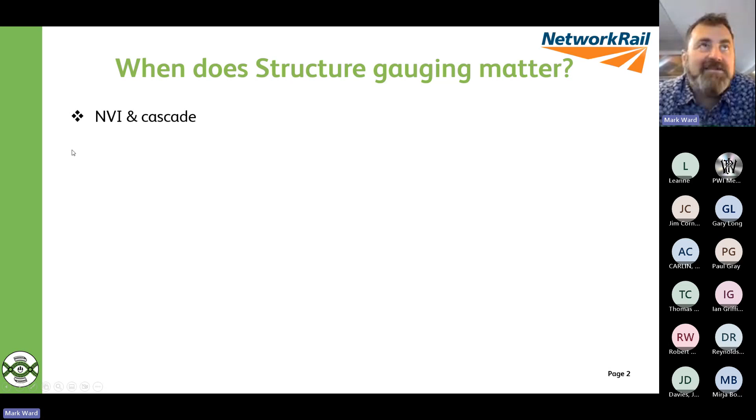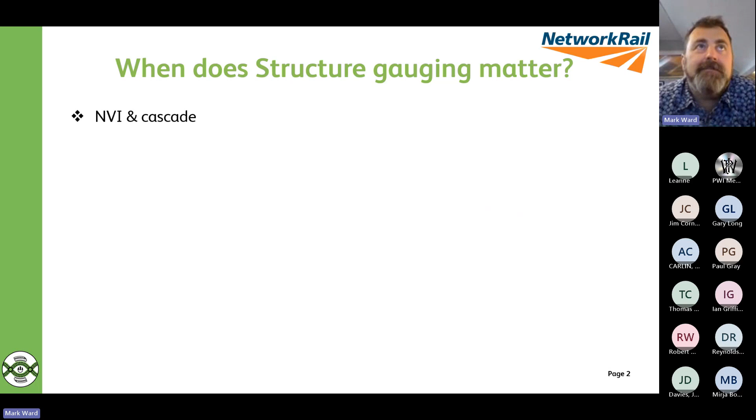First thing is, usually when I'm doing this in a room, I ask what people think - when does structure gauging matter? So I'll run through the list. When we're doing new vehicle introductions and cascades, we need to know if the vehicle is going to be compatible with the infrastructure and vice versa. It's important that we have a gauging analysis at that point.

When we're doing new infrastructure design and build, we need to make sure our new infrastructure isn't going to clash with the first train that goes through. We need to make sure the six foot is wide enough to enable good passing clearances. So it's important then. Freight enhancements as well.

We seem to be getting ever bigger boxes coming in on these big ships - nice big square boxes which don't really work very well with our arched overbridges. So when we're doing freight enhancements, we need to know how much room we've got to safely run freight around.

Infrastructure renewals - if we're doing a track renewal, for example, we need to make sure that when we put the track back in, we're getting sufficient clearances to existing structures. Likewise, if we're rebuilding an overbridge, we need to make sure that overbridge gives us clearance to all the vehicles currently operating, and maybe operating in the future if we've got that level of visibility.

It's also like allowances for electrification. Infrastructure maintenance - we need to know if we're tamping the track and moving that around, we need to make sure we're not affecting clearances in a negative way.

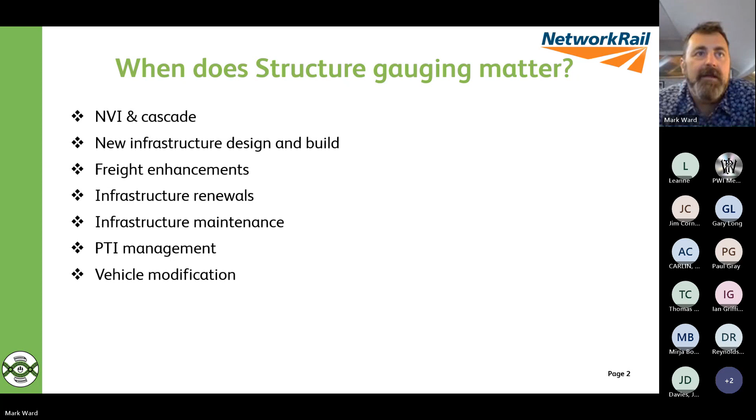Platform train interface management - platforms are a bit special. We need them to be close enough so people can get safely onto trains, but not so close that we hit them. So we need to know where we are in terms of gauging and stepping distances at that point. Vehicle modifications - if we're doing any additional bits of modification to a vehicle...

The example I always use is we've been through quite a few fleet enhancements recently, putting Wi-Fi on. Those have all got antennas which sit on the roof of the vehicles. We need to make sure we're not going to knock those off on the first overbridge we come to, and that it's still safe to operate.

Freight and passenger diversions - if something's gone wrong on the main line, can we still get that freight from A to B? What do we do with all the passenger vehicles sat there on the line waiting to move? Can we send them via alternative routes?

Steam locomotive movements - we've got a big focus on getting passengers back onto the railway. Leisure travel seems to be the bit that's really being focused on. Part of that is running steam locomotives and other charter vehicles around. They're not fully permanently cleared in the sectional appendix to operate, so we need to know that we can safely gauge them and they'll fit the infrastructure.

Out of gauge loads - things like big military movements of equipment that sometimes come outside of the existing vehicle gauge. Are we safe to move those? Things like wind turbines and pipes for the oil and gas industry, we also move them around quite a bit, so we need to assess that we are safe to move them.

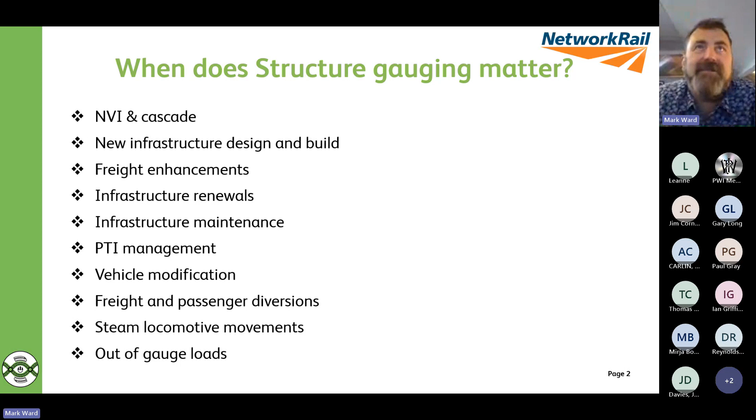A couple of examples here. Stepping distance, obviously that's a nice big wide gap there, which is quite dangerous for our customers.

High output track renewals - are we safe to run adjacent line open in those cases? New infrastructure, that's a Warrior armored personnel carrier. You can see there that's got an offset on the turret, and what we have to do when we're moving those around the country is make sure that offset turret sits in the six foot away from any arched over bridges.

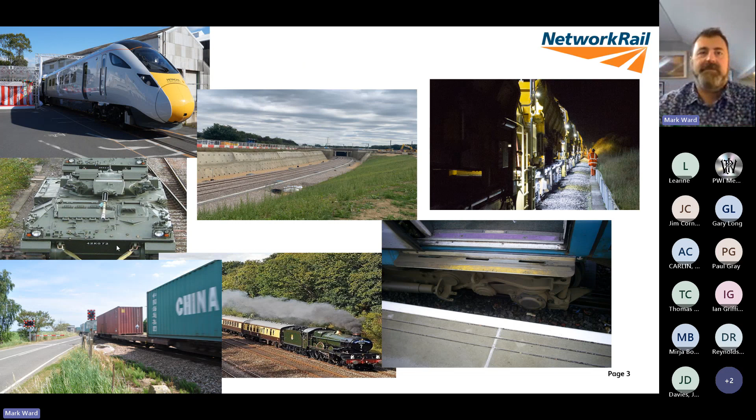So, talk about data requirements. We need a good infrastructure model to assess how big the infrastructure is, where the rails are relative to the arched over bridges or tunnels and any other structures.

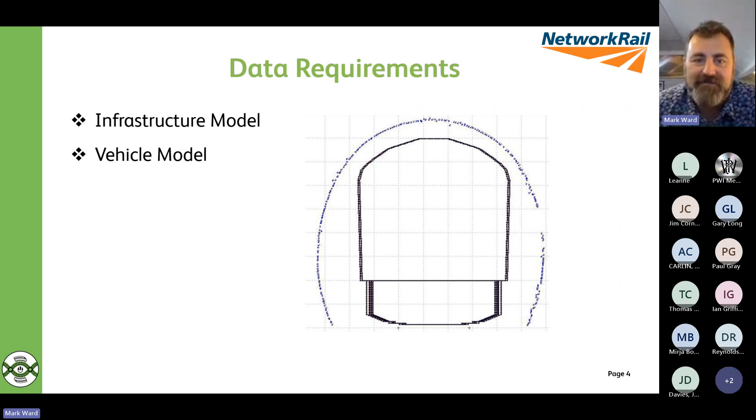We need a vehicle model - how big is the vehicle going to be? Each train is fairly unique now in terms of the passenger vehicles. They all have got the footsteps in similar but different positions. We have long trains, so 20-meter vehicles, 23-meter vehicles, 26-meter vehicles. They all have different throws when you get to curvature, so we need to understand what that's doing.

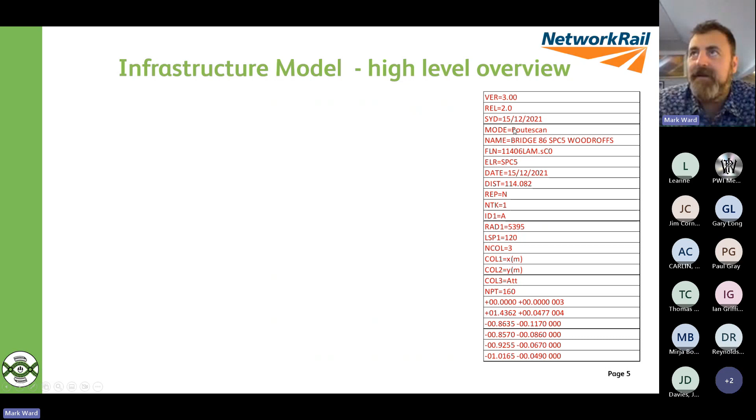High level overview of the infrastructure model. This is what we call a format for an SC0 file. That is formatted from RIS 7773, which is the specification for it. Within that, we need to know what the survey method is.

The different survey methods have different tolerances.

Bear with me one minute, apologies for this. No issues.

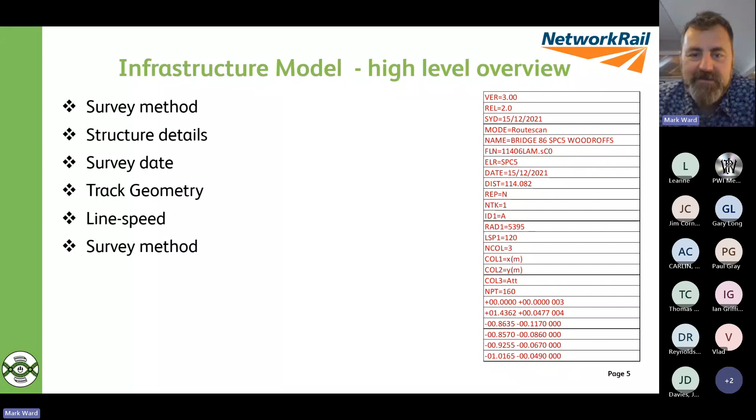The presentation's gone as well, mate. Sorry, hang on, here we go. No. Yep, that's it, perfect. Been one of those weeks. Right, so...

Line speed will affect how much the dynamic input is in the train. Survey method affects the tolerances. The rail coordinates - so we have 0,0,0,0,0. Attribute 3, that is the left-hand rail. So gauging is all relative to a point in space, which is the left-hand rail as the datum point. You'll see that the right-hand rail has got about 14, 36, 2, and then a value. So that effectively is your track gauge plus your cant and the datum.

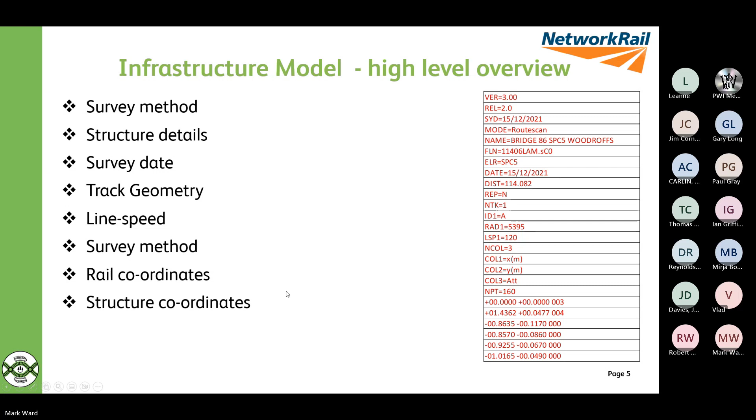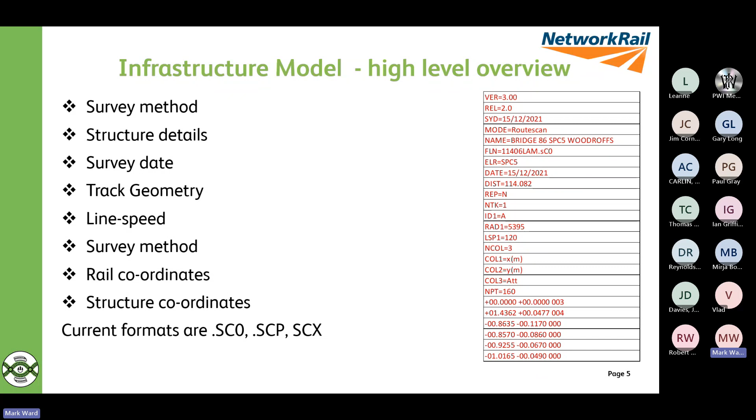Then you have the structure coordinates. All of these coordinates relate to a point in space relative to 0,0. It just helps build up that picture. The current formats are SC0, which are the structure profiles, SCP, which are the platform profiles, and SCX, which are the 6-foot profiles. If you want more information about what it is and how it's built up, it's RIS 7773 INS.

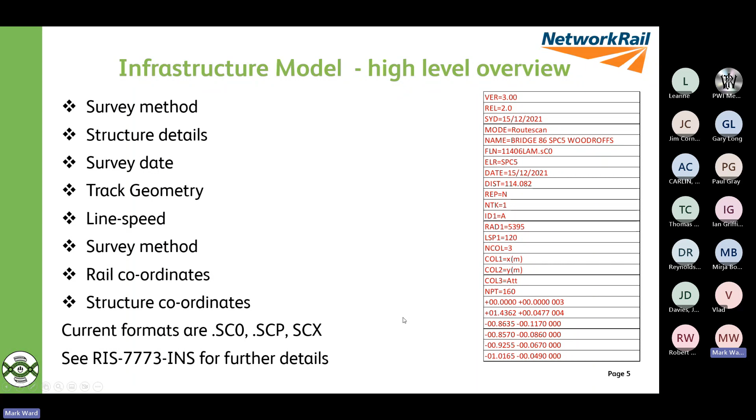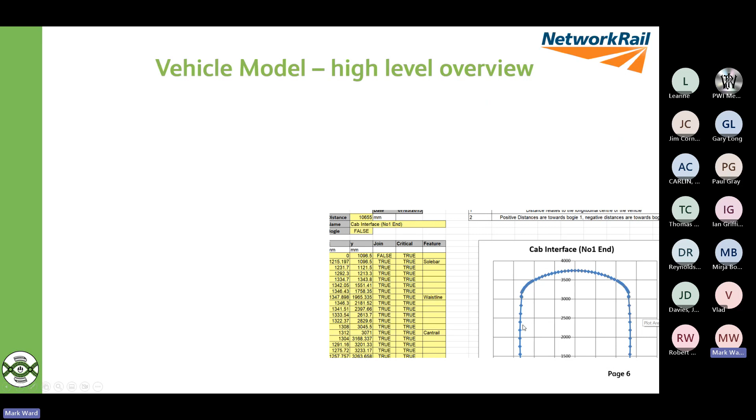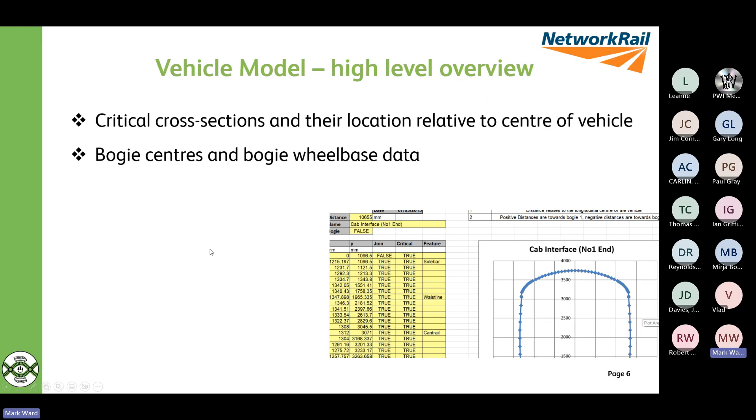Okay, very high level of the vehicle models. Again, it's a set of coordinates, and what you need to know is the critical cross sections - what's the extremity of the vehicle, and where they are relative to the center line of the vehicle. So when it comes to a corner or curvature on the track, we need to know how much those will offset by in terms of their end throw and center throw. The bogie centers and the bogie wheelbase data, that's all in the data in the vehicle model. So the bogie centers again can affect how your throws operate on the train.

Vehicle dynamic data - how much does the train sway around and roll for cant deficiencies? How much does speed increases and decreases affect that? What are the suspension characteristics, so a full train will potentially sit lower than an empty train. It's all of those sort of things that you need to model. What the maximum vehicle speed is - there's no point assessing a vehicle at 125 mile an hour because that's your line speed, if the vehicle itself can only do 70.

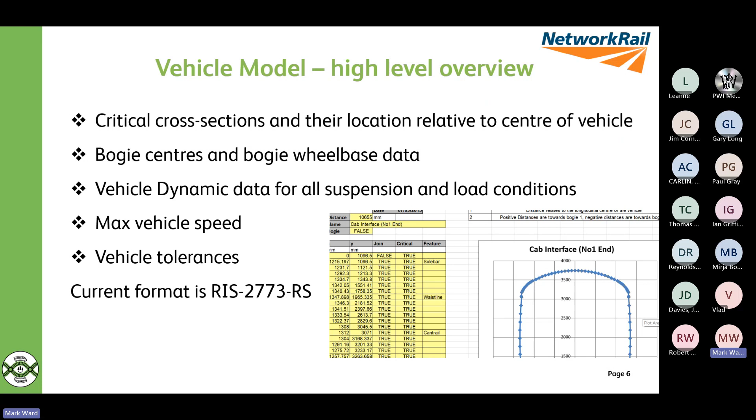What the vehicle tolerances are, so how well it was built. We're getting quite good nowadays at building fairly consistent rolling stock. In the old days, some of the Mark 1s and 2s, there was quite a big tolerance on each different body shell - you measured two at the end of a production line, no two would be alike. So, what the vehicle tolerances are. Again, there is a RIS for this - the RIS 2773 gives you the current format. It's a fairly well understood vehicle model format. It includes all of the above, and it's worth reading because it's quite an interesting read - you go, that's what's included. It helps you understand what builds up these vehicle models.

Gauging group standards and RISs. So the first one is 7073. That effectively is how we categorize and manage clearances.

RIS 7773 is the infrastructure model data. We've got 2173, which gives you some vehicle requirements - how you describe the vehicle, where you would put the footsteps when you're building a new vehicle, what compliance looks like for stepping distances, and RIS 2773 for the model itself. Then we have RIS 8273, which says when you're introducing new rolling stock or new infrastructure, you need to do a gauging compatibility assessment to make sure the two play nicely together.

So a big chunk of the work that I do is working with RSSB around current standards, future standards, and research.

Currently there's quite a bit of work going on around 7073. One of the big issues for us as an industry is the requirement for an allowance for window box - where we have the older rolling stock with drop light windows where you have to pull the window down to open it from the outside, you had to have an allowance for that, which was 450 millimeters between the infrastructure and the vehicle.

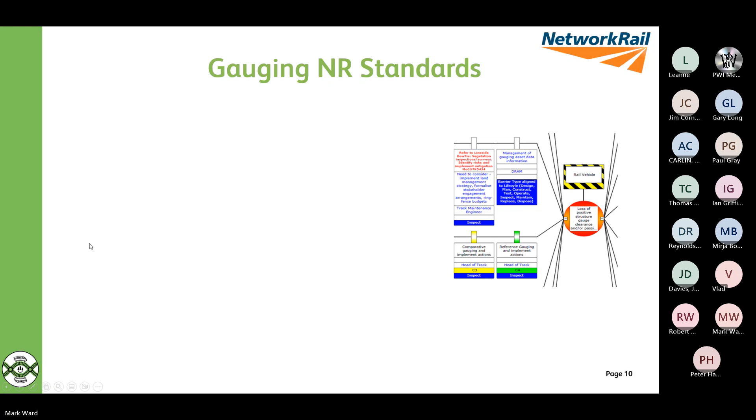Okay, network rail standards then, we are changing them. So we have a new standard coming in called 3204, which replaces 3201 and 3203. Current standard 3201 is effectively what the TME needs to do to manage clearances. 3203 is what we need to do to collect the data, process the data, make it available to our stakeholders.

So we've had a review of the existing standards. They were written in 2011, so they're long overdue for renewal. All based around what we call our bow tie risk management process for gauging. So we have a high level event, which is the loss of positive structure gauge clearance and/or passing clearances. We had a moving rail vehicle into the mix, then you have an issue if you've got to that point.

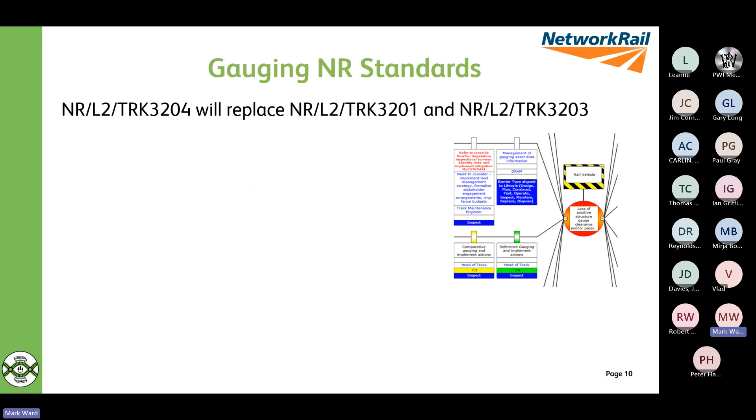So what are we trying to do? We're trying to improve data collection, making it easier for new surveying methods to come in. There's a big push at the moment on point cloud, trying to get those into use. So measure the infrastructure once, use it for many different purposes - getting your OLE, getting your gauging data, getting your digital twin, doing it all from point cloud.

Data currency, so making sure that our data is up to date effectively. There's a bit of a push on that - more of a risk-assessed approach to gauging management.

So at the moment, we treat all foul locations as the same level of risk, whereas that's probably not correct. Some fouls are worse than others. So if you've got a straight track, for example, the track is less likely to move than where you've got high curvature. So the risk would be higher than with the straight track.

So we're looking at wide and low platforms from PTI. Effectively, a high platform or a tight platform is actually quite good for a passenger because it's narrowing that step between the railway footstep and the platform edge. So we're looking at only the wide and low platforms in terms of understanding where we've got those and what it looks like.

Okay, the publication date is December 23, which may or may not slip by a month. I've had a very long conversation today with a couple of stakeholders. Compliance date would be June 24. So we've got basically 6 months from publication to compliance of the standard and get a plan in place to enable compliance. So as part of the risk assessment, doing quite a bit of work.

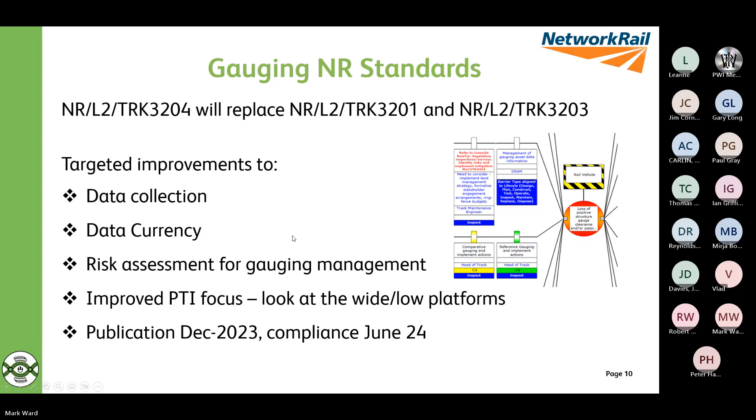So that's the main driving the standard change. Okay, a bit about the network rail systems we use for gauging. So National Gauging Database, we moved to Railway Gauging Data System in August this year. So it's gone live last month, fairly stress-free. There's a couple of glitches along the way.

We're working pretty hard to overcome them. But effectively, as an end user, if you're currently using ClearRoute, you will still be downloading your data from Balfours to use within ClearRoute.

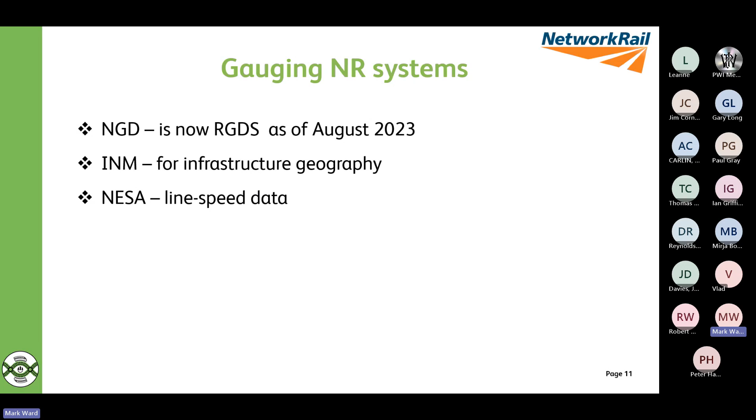INM, so our infrastructure geography, where we are with it, where it sits, that is where we hold that - so that's our vehicle, our infrastructure model, what tracks go where. NESA, where we get our master for our line speed data from. We are not very good at aligning infrastructure engineering data with operational data, so there's a bit of a mismatch between those two, which we're trying to work and get around.

Vehicle matrix - so being able to work out the clearances for any given track, we need to understand which vehicles and gauges are cleared where. When that comes into it is when we work out what our network clearances are. So we know for any given structure on the network what the clearances are to that structure. We know that because we know what the vehicle matrix is - which vehicles are going to go past there, which freight gauges are cleared past there. So that all gets calculated up into RIFT.

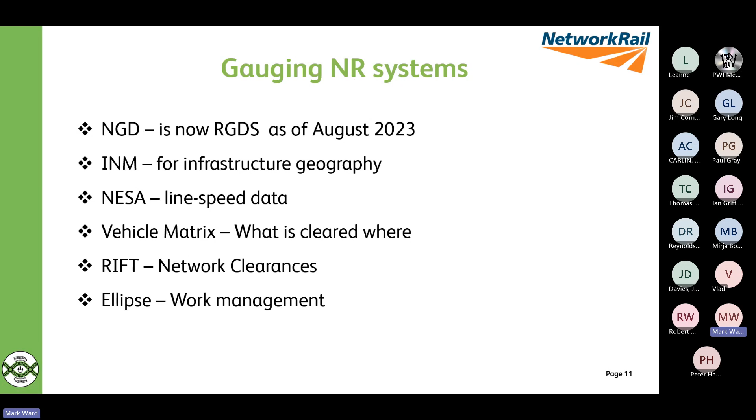Ellipse is where we manage our work. So anything that says you will go and do a manual check at this location gets put into Ellipse. So they're the systems that we use to manage gauging.

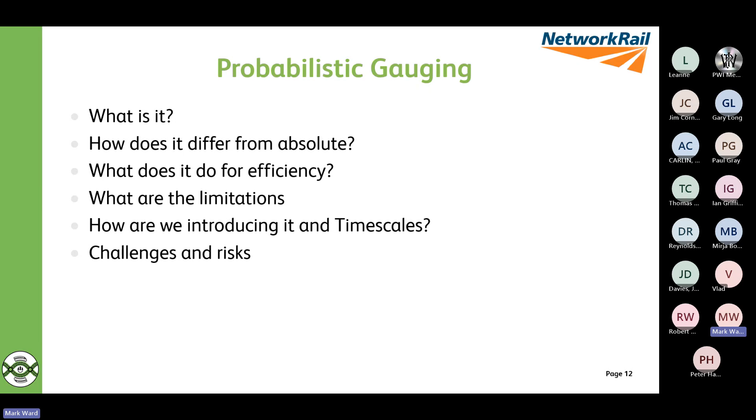Moving on to probabilistic gauging, which some of you may have heard of. I'll cover what it is, how it differs from absolute gauging methodology which is the current one we use, what it does for our efficiencies, and what the limitations are. It works, but it doesn't work everywhere. I'll also cover how we're introducing it and the challenges and risks around it.

First, our current process, which I've talked about a little bit already. We've got an infrastructure data model, a vehicle model, and the standard requirements that tell you how to calculate it. That all goes into gauging analysis software.

Currently there are two flavors of that software. There's ClearRoute, which is Omnicom Balfour Beatty, which probably most of you will be familiar with. There's also a company called DGauge who have Rift. You put the models through all of this with the standard requirements that say these are the allowances you need to operate and include in your analysis. Out of that, you get the absolute gauging output - the clearances as per all the standard requirements against the vehicle and the infrastructure.

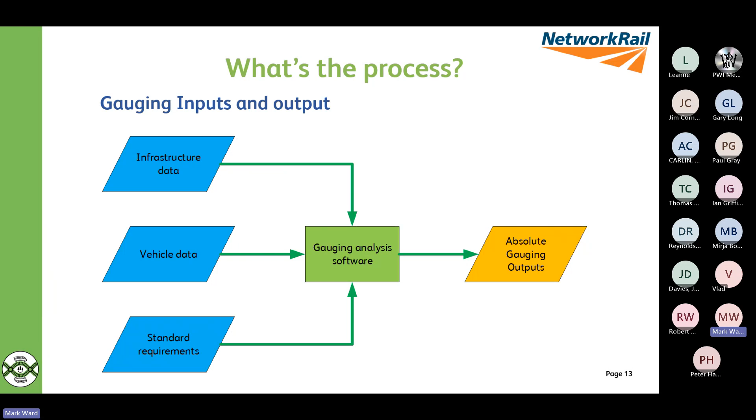So that doesn't change. The existing absolute gauging methodology - we do the calculation, we get the outputs. It will say bridge 10, you've got 50 millimeters, platform 2, you've got 2 millimeters, etc. So it gives you all the clearances.

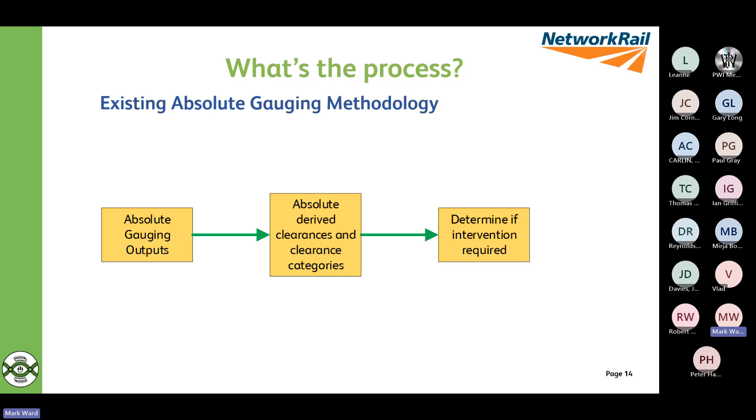We take that and we allocate clearance categories to them as per 7073. That ranges from normal, reduced, special, reduced. At that point, when we have all of that, we then determine if intervention is required. So if we're introducing a new vehicle, for example, we'd take the existing infrastructure model and the vehicle model, calculate the clearances, work out if anywhere has fouls or clearances we're concerned about, and whether we need to do anything about it. That could be tamping the track, altering the position of platform copers, or any range of things. That's what we do currently.

Probabilistic gauging methodology is slightly different. We take the absolute gauging outputs, and the first question we ask is, have we got normal clearances? If yes, effectively we're not interested in that, we just go down that route. If the answer is no, we've got something tighter than that, then we move up to assessing it with the probabilistic methodology. I'll talk about it in more detail in a bit, but this gives you the overall process for now.

So we do probabilistic gauging methodology on the places where we don't have normal clearances, and we get probabilistic derived clearances and clearance categories. We combine the two. So it might be bridge 10 - we use the probabilistic methodology to assess that one because it's less than normal. Bridge 11 might be normal clearances, so we'd use the absolute gauging output straight away without doing anything further. Then we work out if we need to do any intervention. That's the overall process at a very high level.

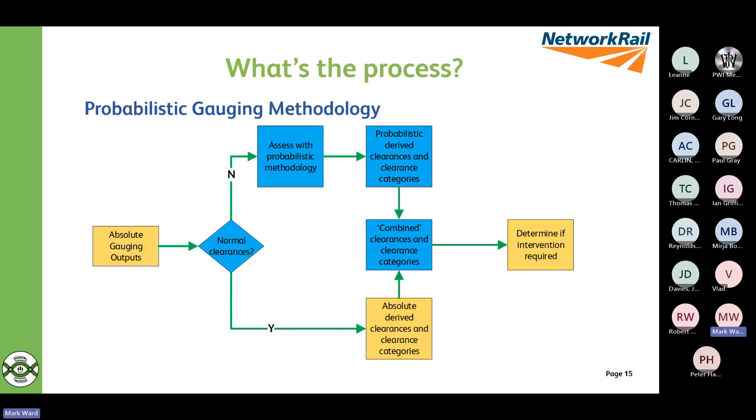For incremental loading, for example - the dynamic movements that get put into it - currently we have to assess tare and crush, and we consider it as a one-off calculation. We'll say this is the maximum envelope the vehicle can take up, both in height and drop. In probabilistic, we'll do the calculation multiple times with various different conditions.

For loading, we apply a 10% incremental between tare and crush. So we'll assess 10%, 20%, 30%, 40%, etc., all the way up to 100% loaded. For vehicle condition, we have a deflated and inflated suspension considered equally.

For an absolute gauging analysis run, you assume that at some point the train is going to be deflated, so you allow for that in the calculation. Part of this is as high as it can be, this is as low as it can be - it generally affects the height, so it'll be sat low in its suspension. For probabilistic, we apply a 1% deflated equation.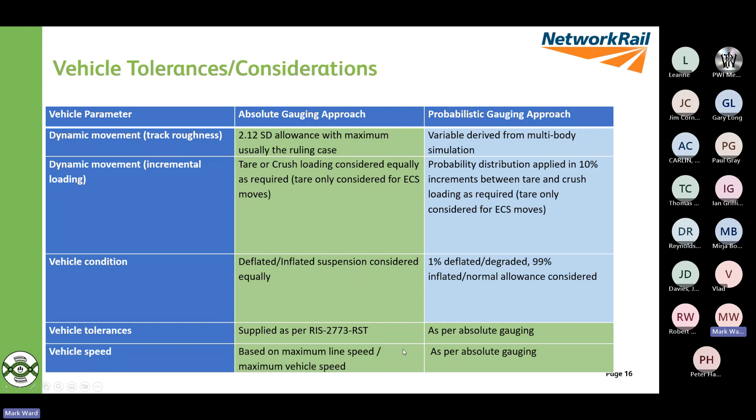We still think that is probably quite pessimistic because we're not getting 1 in 100 airbags going pop. The vehicle build tolerances are as supplied by the vehicle manufacturers, and that's the same for both. The vehicle speed is based on the maximum line speed, same for both, so you have to consider everything from low speed through to high speed in your gauging analysis.

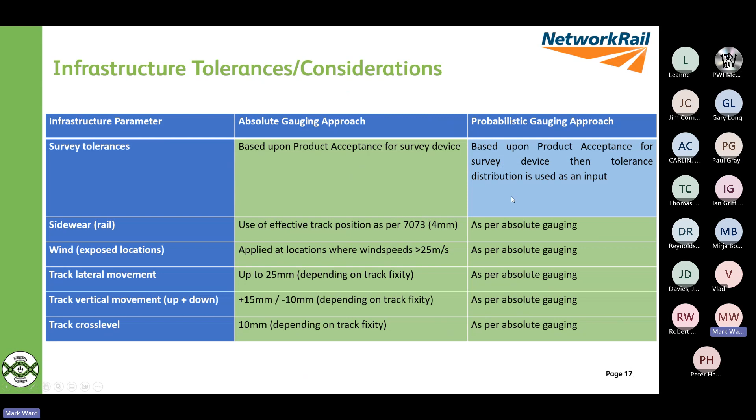For the infrastructure parameters, they're all the same. The only one we play about slightly is the tolerances of the surveys, so we put a distribution on that. When we calculate it, for an absolute gauging analysis you would do one clearance analysis - this one structure, this one vehicle at this one location, these are the clearances.

For probabilistic, you do multiple runs. So in this example, for run 1, you would say its survey tolerance is 10 mil, we've got 100% of our effective track position - where the track can be under maintenance - 10% loaded, an inflated suspension case, and 50% of the full dynamic movement range. For the second run at the same location, we'll change all of those up. Third run, etc. We build up a whole load of different parameters around each of the individual bits that make up the clearances. At the end of that, it's usually about 10,000 calculations to get a representative value.

You get a distribution, so you get some weird stuff on the outsides where everything's at its maximum condition, and you get the weird clearances at the other end where everything's at its absolute best condition. Somewhere in the middle is the reality of this. So what it does is take around 95% distribution of the overall clearances and uses that as a probabilistic probability of whether your clearances sit within this range.

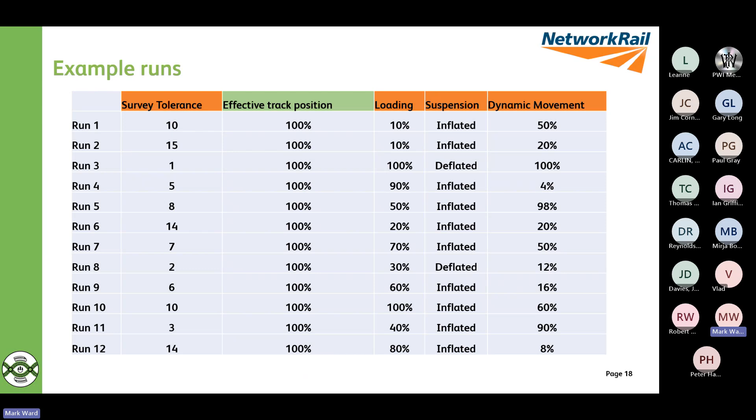What it does for efficiency - first of all, it calculates more representative clearances. So when we calculate a foul in the current analysis methodology using absolute gauging, we calculate fouls at locations where the trains are going quite happily past them every day. It doesn't mean there isn't an issue there, but it does mean that if all the worst cases emerge at the same time, then you may have a problem. So it calculates a more representative clearance.

That increases the calculated clearances under certain conditions, but it doesn't resolve every single location. There are certain variations of track geometry, line speed, or vehicle where you're still going to get a problematic clearance, whether you do it absolute or using probabilistic.

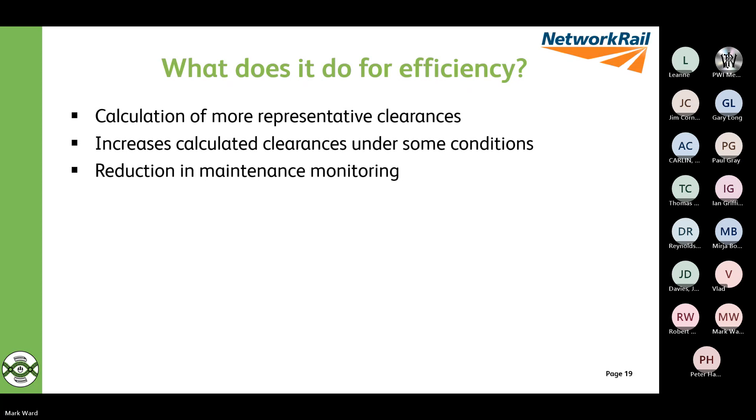It's got potential to reduce our maintenance monitoring. So if we're getting representative clearances, it enables us to inform the maintenance teams about what the real priorities are. If we're getting a clearance shown as a real problem with probabilistic, potentially it enables them to prioritize where they need to start looking first.

Reduction in infrastructure intervention for new vehicle introduction - we're less likely to see problems at platforms for newly introduced vehicles, just because of the reduction in inflated and deflated conditions. It increases our infrastructure availability time - we're not going out doing loads of alterations to infrastructure, incremental measurement at locations, or additional maintenance tamping, because we know we've got that bit more representative clearances. It's not worst case that we're showing.

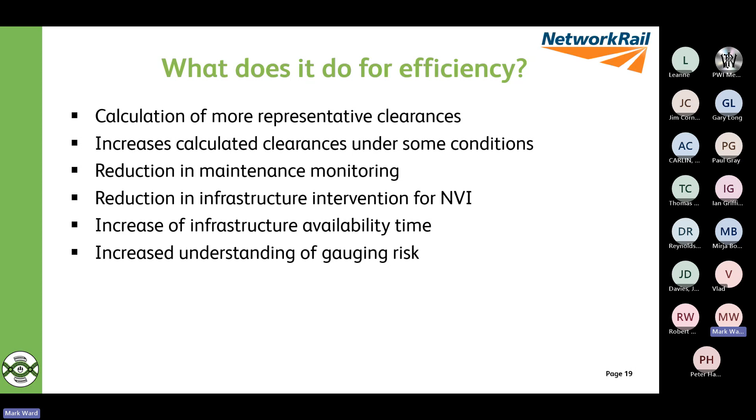It increases our understanding of actual gauging risk. So not all foul clearances are the same - it may be that some foul clearances that are calculated are actually less risky than our special reduced clearance, for example.

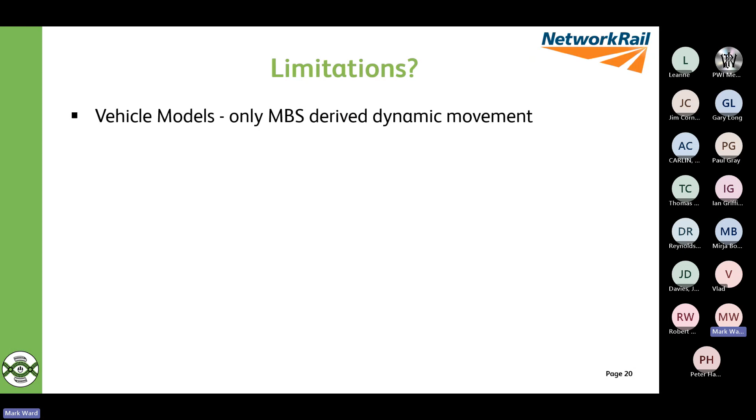Limitations to use around it: the vehicle models - we can only use multibody simulation derived dynamic movements in the vehicle model, so that's software like Vampire and others that are available. A lot of the older vehicle models are quite basic in their dynamic movement. This is pushing us more to getting better vehicle models.

It can't be used for the freight W gauges. The freight W gauges are, in most cases, an amalgamation of several different suspension types. Because of that, we can't do a proper dynamic assessment on them for probabilistic.

It doesn't negate the group standard requirements, so we still need to put the platforms in the right position, build lower sector structure gauge correctly, and provide proper clearances for electrification. So it doesn't negate any of that.

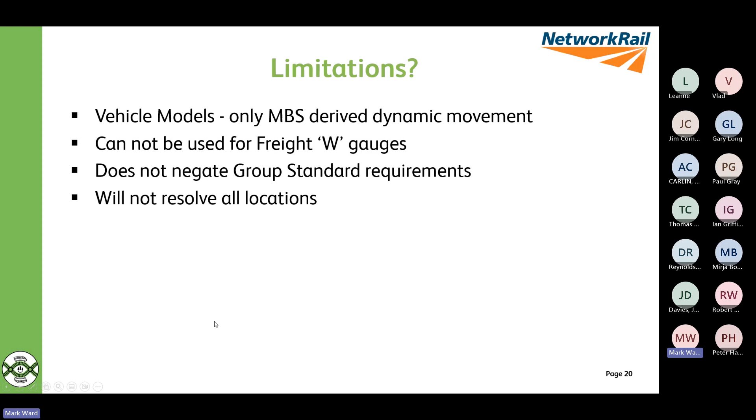It doesn't resolve all locations, so we've still got some genuinely tight locations. It's not a magic wand - they will still be a problem.

In terms of how we're introducing it, we did a trial a couple of years back on the Glasgow-Mallaig route. We are currently undergoing a Network Rail safety review panel. It requires a RIS for the compatibility assessment purposes, so the Network Rail SRP will only enable us to use it to inform maintenance, just because gauging is an industry interface. If we don't have a RIS for it, we won't be able to use it to introduce new vehicles or infrastructure.

So to that end, as mentioned earlier, we're working with the RSSB to have this RIS created - risks and requirements for rollout. The vehicle models - like I say, there are some limitations around which vehicle models can be used, and we're looking at getting some limited vehicle models updated. The outputs of it currently only reflect what we do for absolute gauging, and we'll need to get it modified to adjust to show our probabilistic clearances as well.